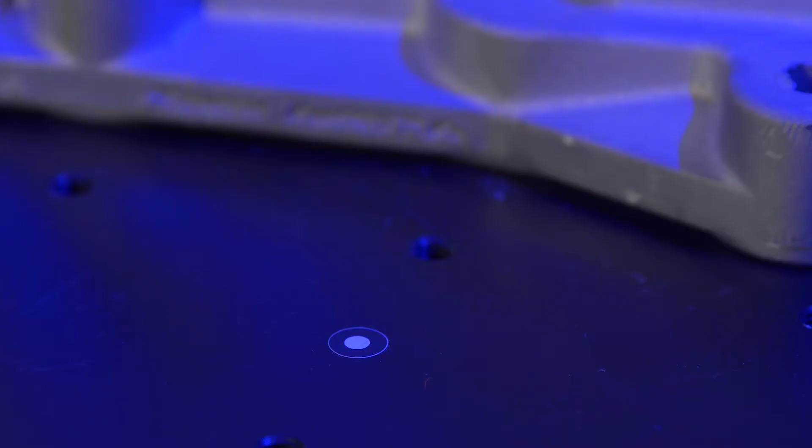For this part, we're using the largest field of view that's available on the ATOS Q, which is 500 millimeters. Using this remote control and the manual rotation table makes scanning fast and easy. For scanning this part, I've put some reference points on the turntable, and that allows us to move the part or the sensor between the scans, and the software can automatically align them together. Also, the ATOS Q is a very fast sensor, and we're capturing up to 12 million data points per scan.

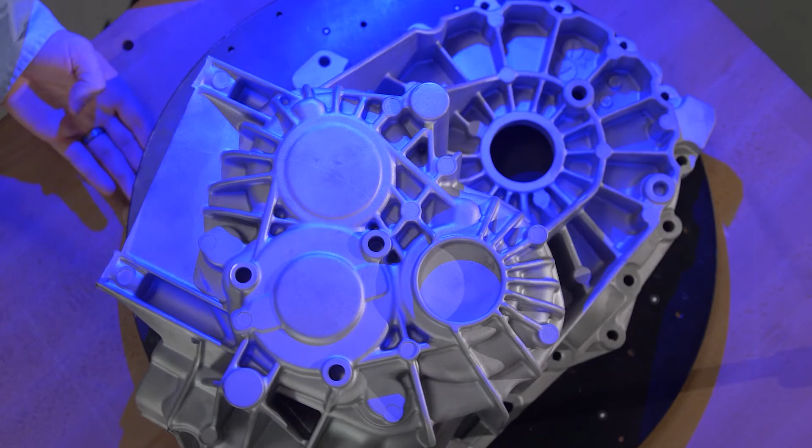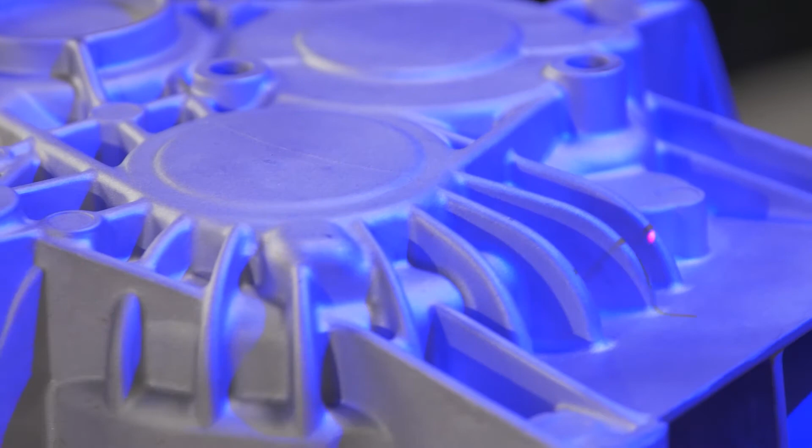The ATOS Q takes advantage of all of the latest GOM technology. This includes the triple scan functionality, which allows us to capture data in even hard to reach areas. Additionally, the system uses a fiber optic cable connection, 2 fast cameras, and the latest GOM fringe projection techniques in order to ensure that we have very accurate scan results. Now that we've seen a quick overview for how the ATOS Q captures detail on a complex part, let's take a look at some evaluation in GOM Inspect software.

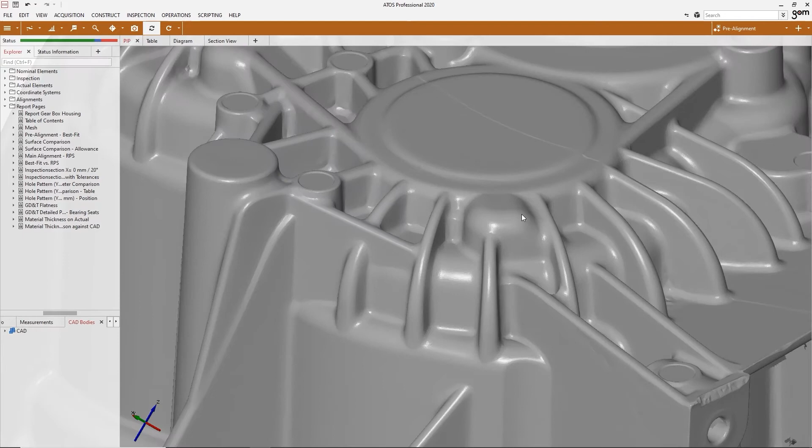The result of the scan is an accurate digital copy of the part. Even these very difficult to reach areas that we can see here are captured easily using the triple scan technology. In terms of resolution, this is what you can get from the ATOS Q using the 500 millimeter field of view. GOM Inspect allows you to create color deviation plots, do section inspections, check your feature locations, and do full GD&T analysis. An extensive set of alignment features, measuring principles, and reporting tools make this a very complete package.

Also remember that GOM Inspect is free to use, so it's very easy to share your inspection results within your project team. So now we've had our first look at an overview of using the ATOS Q for scanning a standard sized part. Now let's take a look at a second setup of the system and talk about some more details of the ATOS Q.

The ATOS Q comes in 2 different versions. There's a 12 megapixel version and an 8 megapixel version. You'll also notice how small the system is. The ATOS Q sensor head weighs only 4 kilograms, which is just under 9 pounds. This makes it very easy to take it with you to the job site. Another benefit for the ATOS Q is that it comes with 5 different measuring volumes. There's a 100, 170, 270, 350, and 500 millimeter variations. For the die-cast gearbox earlier, we used the largest measuring volume at 500 millimeters.

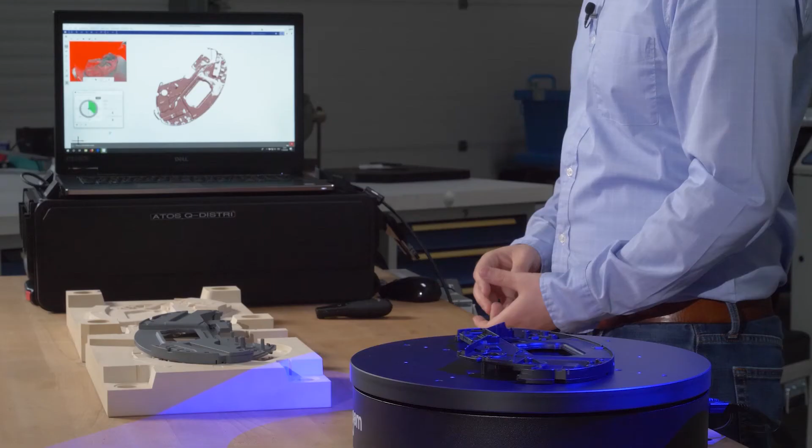This plastic part here requires more resolution than we had for the part that we scanned earlier. Therefore, I switched the measuring volume out to the 350 millimeter field of view and recalibrated the system. To make scanning even easier, I've set up the part on the GOM ROT 350 automated turntable. The GOM ROT 350 is controlled in the GOM software, so we can select 8 measurements here and start the scanning process. As we scan the part, you can see the data being built up on the screen as we go. You can see here just how fast and easy it is to scan with the ATOS Q in this configuration.

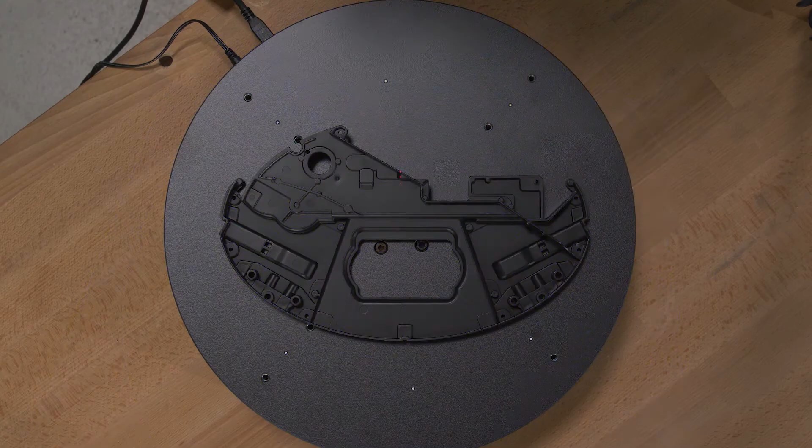Now that we've finished measuring the top side of the part, we need to flip the part over in order to capture the bottom side. To help us align the top and bottom scans together, I've put some small reference points on the side of the part. These allow the software to automatically combine the top and bottom halves of the part together. The result that we'll see later is going to be the high detailed mesh of the entire part. So now let's start scanning the back side.

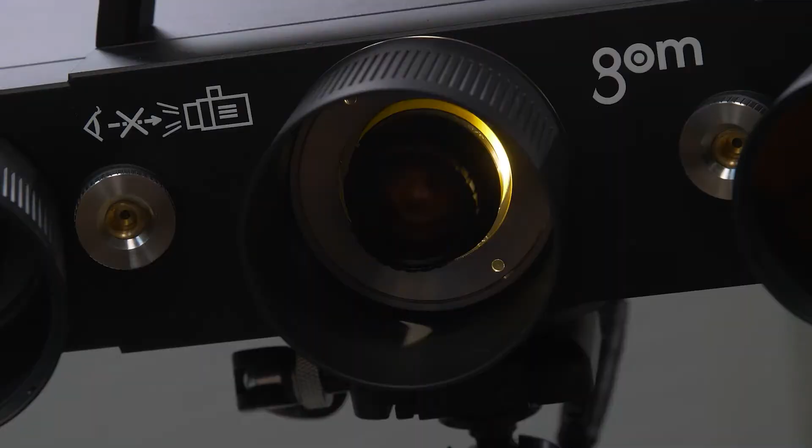The blue light that you see projected on the part comes from a very sophisticated light source. This projection technique was developed by GOM to produce very low noise data. This also produces a uniform speckle-free light. This light source ensures that we have the most accurate and repeatable data possible. So now both scans are finished and they're combined together in the software. So it's time to take a look at the results.

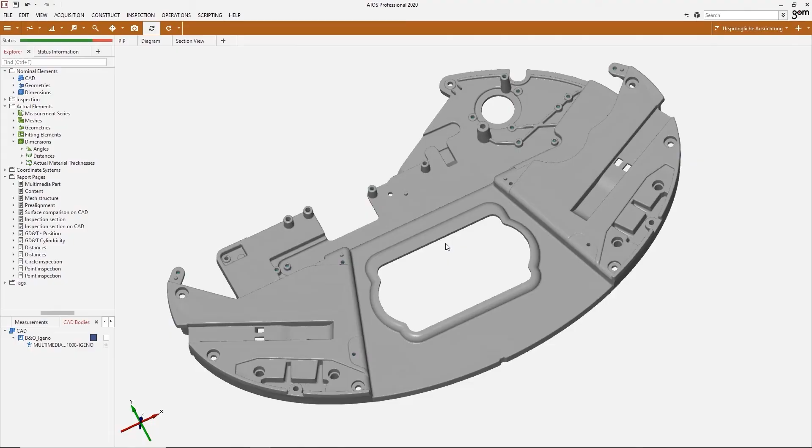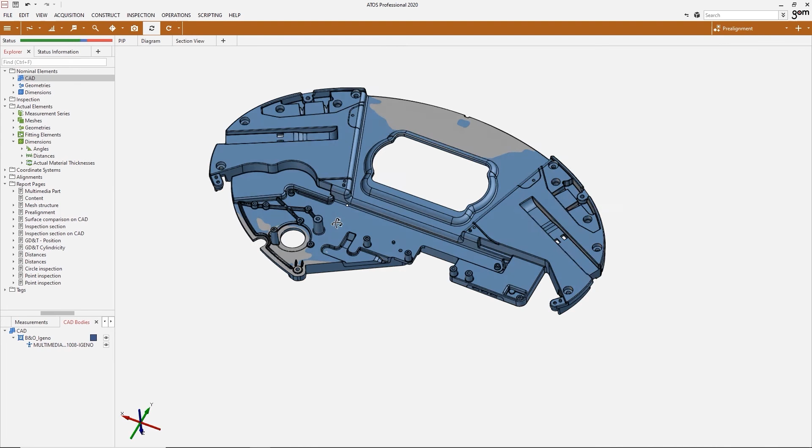Here's our scan result. We now have a high detailed mesh which is describing all features of the part. Since we scanned both sides, we have the complete digital twin, which we can join with its CAD file to start the evaluation. The first step is the alignment of the part to the CAD model. Both overall alignments and local alignments are possible inside GOM Inspect. Again, since we scanned the part from both sides, we can now analyze the thickness of the part and verify if the thinner areas are to specifications.

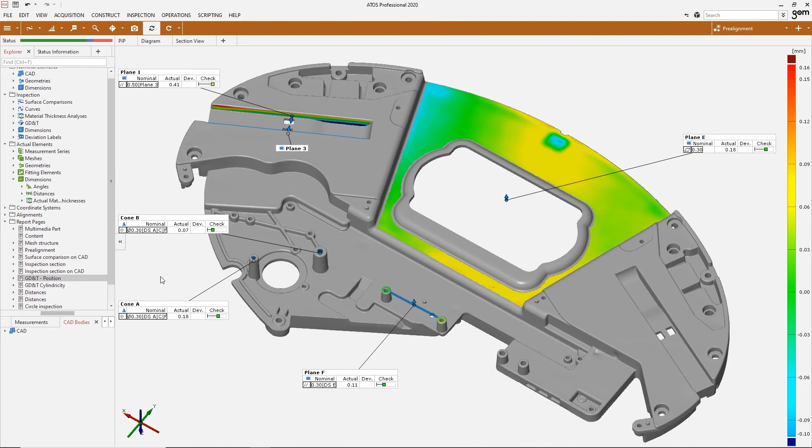The design of this part requires a lot of GD&T style inspections. These are calculated on the scan data, describing the part in great detail, and offer a very accurate and realistic evaluation. Reporting of the full analysis is done in the reporting space. Even from a black part like this one, you can see how clean the results are. Remember that GOM Inspect is available free of charge and can be used to share all the data in a way as you see it here on the screen.

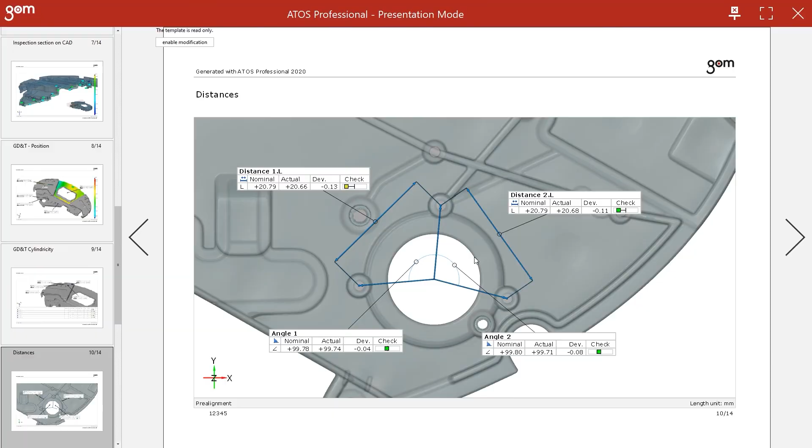So what if we want to scan multiple parts? We've already seen the scanning speed of the ATOS Q in this configuration, and we also know that the GOM Inspect software is parametric. That means that we simply have to add the second, third, or any subsequent scan data into our original inspection report. The software will then automatically recalculate the inspection and deliver you a full trend analysis across all of your parts.